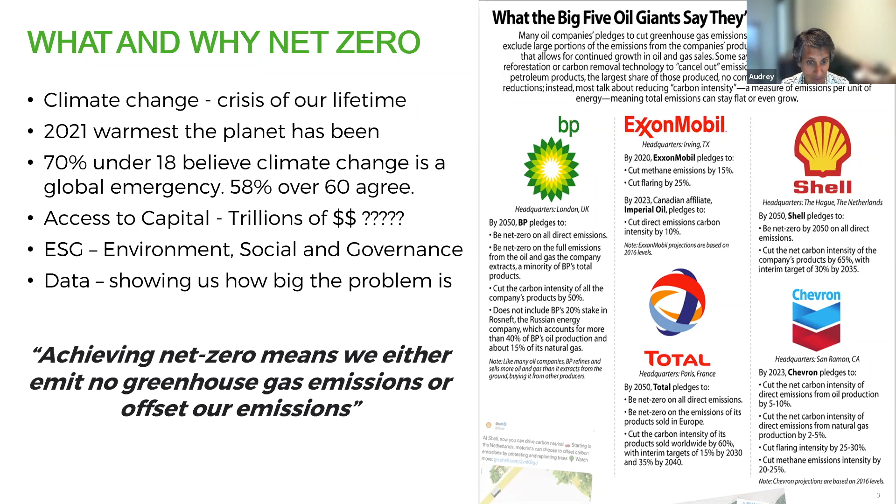Now, there's a lot of narratives going on right now. One of the ones that you'll hear a lot is that natural gas is not the fuel of the future because of methane, it is actually dirtier than coal. You've got a whole bunch of environmental groups going, the future is leaving oil and gas in the ground. We should shut down all of our oil and gas production, and we'll get all of our energy from solar and wind. And I'm going to talk about that in a second.

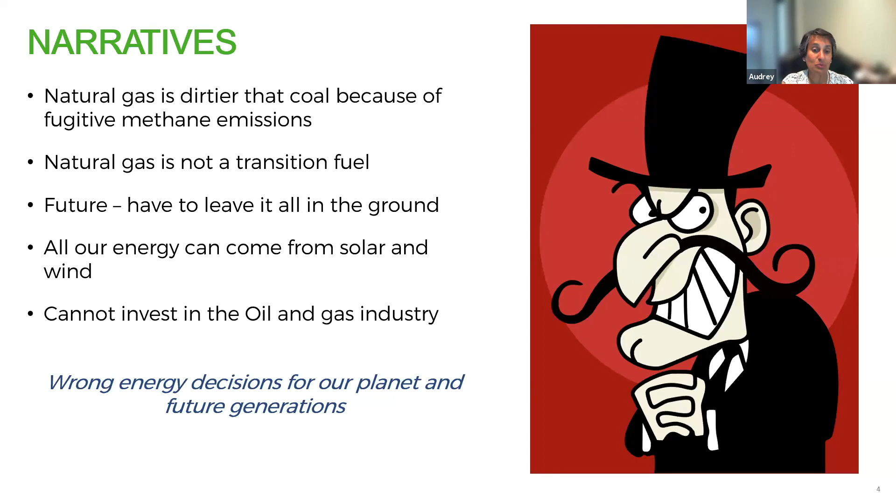At the end of the day, we're also seeing a lot of pressure on investment not going into the oil and gas industry, because the view is that our industry is contributing to climate change. And if we invest in it, then we're going to continue to have this temperature rise. The problem with all these narratives is that they are false. But the problem is, as they take hold, it's actually going to cause us to make the wrong decisions for our planet and for future generations.

I found this a very interesting fact, and it's actually a slide - I apologize, it looks old. It's actually a slide from my 2010-11 Distinguished Lecturer discussion. But one of the things that amazed me was every year, we use around 32 billion barrels of oil. That means every second the world consumes 1,000 barrels.

By 2100, we will have over 11 billion people on this planet who are going to need food, clean water, clean air, and are pushing for this higher standard of living. What that means is our demand for energy is going to continue to go up. In addition, we currently use 3 times that amount from an energy equivalency point of view.

And the phrase that was coined to represent this 32 billion barrels that we use yearly, it's referred to as a cubic mile of oil. And in total, our planet currently uses 3 of them. If we were to replace that amount of energy, I thought that it was quite interesting to look at that.

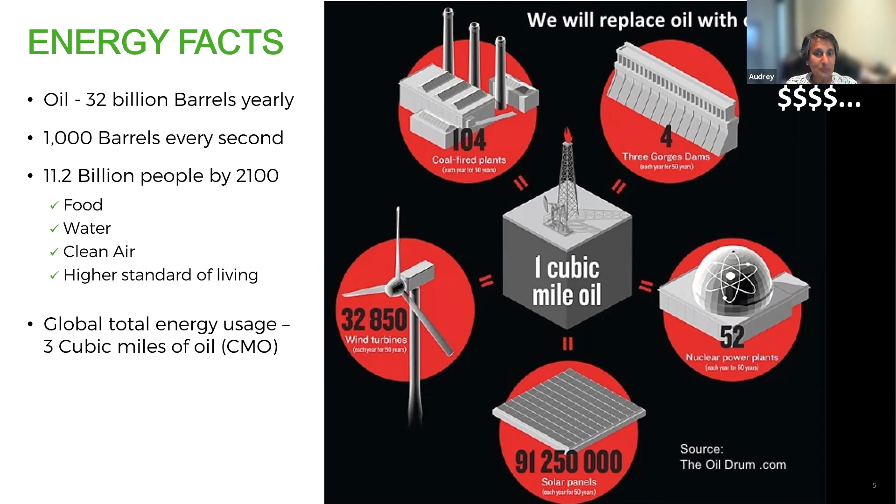So when people say, oh, we should just shut in the oil and gas and get all of our energy from renewables, I don't believe that that is truly feasible or realistic.

This next slide looks at where we get all of our energy. On the left-hand side, what you can see in that graph is 75% of our energy currently comes from oil, gas, and coal. By 2035, it will have increased and still be a very significant portion of our energy mix. Yes, renewables, hydro, and nuclear have increased, but they have increased at a far smaller scale than our demand for oil and gas. So when you look at the graph on the right-hand side, it does show a bit of a decrease in oil and coal, but more importantly, it shows us continuing to increase in gas.

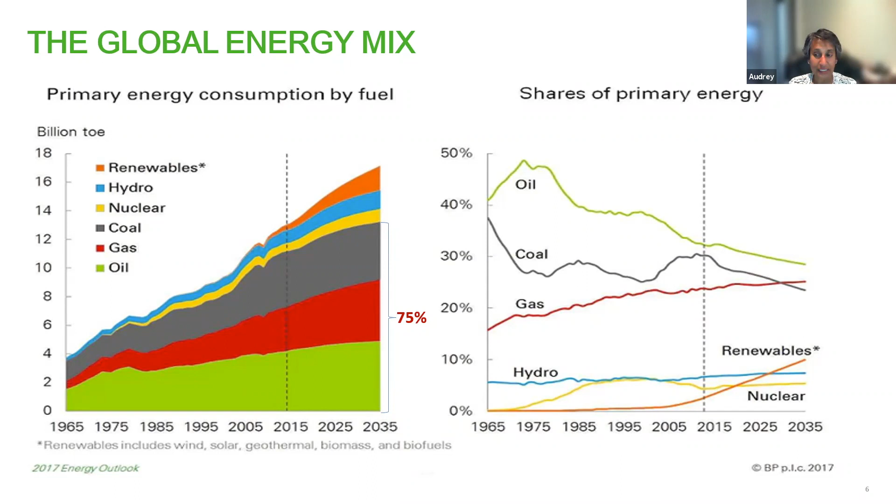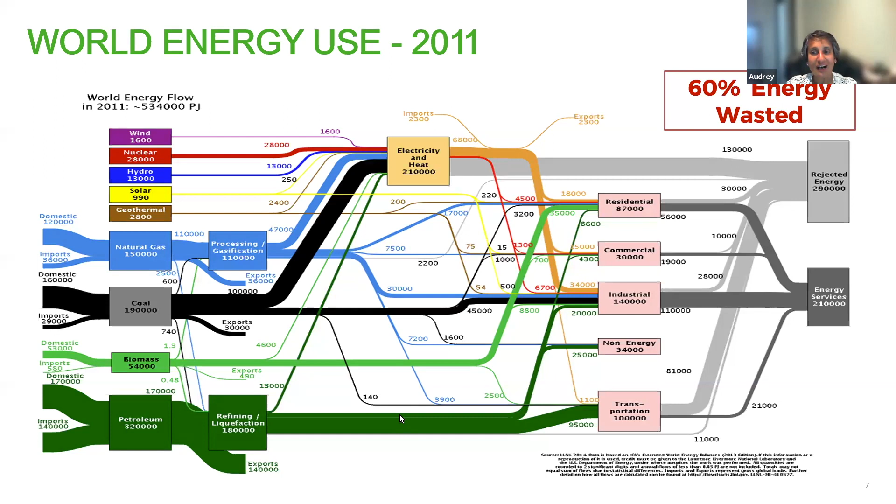Additionally, when you track world energy use and follow that molecule, I found this quite interesting. At the end of the day, from all our different sources of energy, we're wasting 60% of it through waste heat and energy efficiency losses. So between our demand and how we use it, I think there's an opportunity to look at the efficiency.

I think we've underestimated our emissions from all the different parts of our value chain. By underestimating it, we've missed a true opportunity to tackle the low-hanging fruit that solving and eliminating methane emissions brings to climate change. We know methane has a big impact, and that it's 86 times worse than CO2 over a 20-year period, and 25 times worse over a 100-year period. The problem is, as it lingers in the atmosphere, it starts to break down and eventually forms CO2, but in the process it emits VOCs and ozone and forms other toxic compounds.

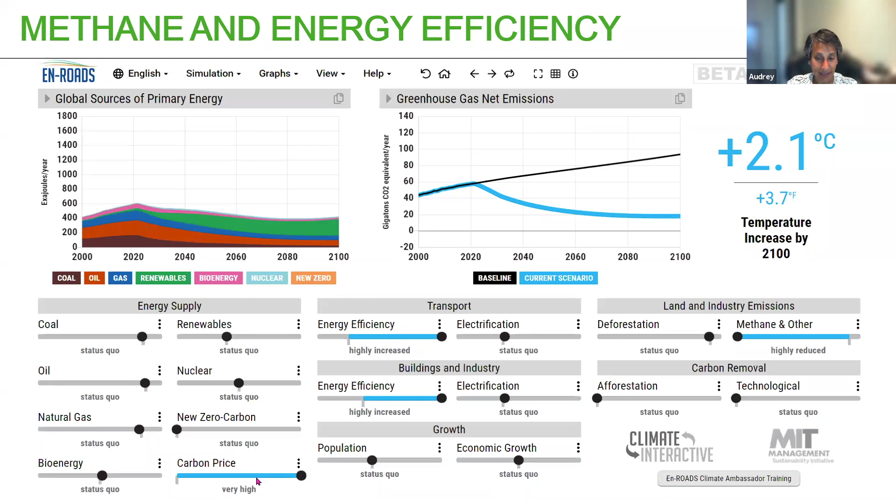So if we look at our industry and look at where the sources of methane are, what you'll see is that we have emissions all the way from our wells, in drilling, completions, production operations, all the way to distribution to consumers, whether it's in gas processing or equipment, or leaks or maintenance. It comes from tank vapors, valves, pneumatics, and compressor seals.

You'll see a lot of conversation around this component, but I believe that's less than 5% of our emissions. The big emissions come from well unloading, for example well testing, flowbacks, and workovers.

I've been in some conversations with folks in Australia, actually, where because of the risk of forest fires, there's a lot of venting occurring, which I think would be a great opportunity for us to reduce GHG emissions significantly. We'll talk about that in a sec.

Our compressor stations, pipeline maintenance and facilities all have maintenance requirements and upsets. When we start up an engine compressor that's gone down, we usually do a soft start, which means we're venting the methane to unload it. And then finally, we know that a lot of abandoned and suspended wells are leaking methane as well.

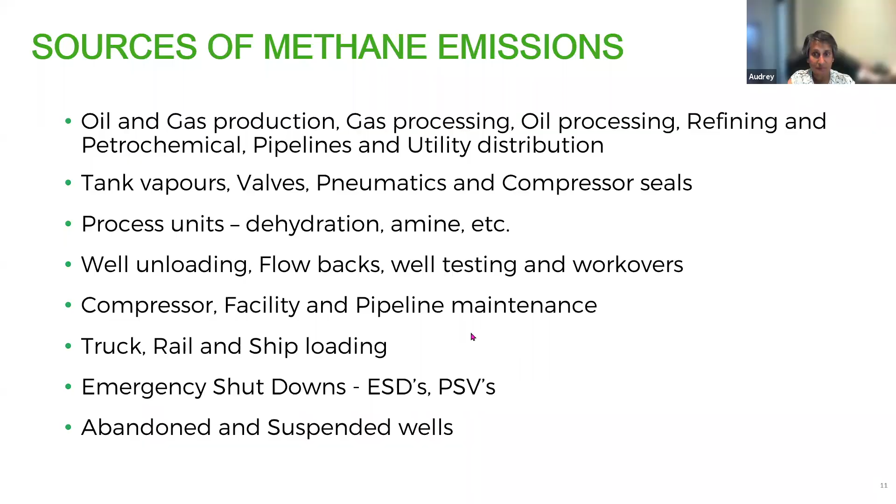Now, what's been interesting in the last little while is all of the different tools that are available now to detect our emissions. I've titled this slide 'There Is Nowhere to Hide.' As satellites, planes, and drones become available, what they're showing - and this is a quick project in the Permian - is all the sources we currently have of methane emissions.

And what was interesting, it also showed that there were a lot of flares that were unlit. 10% of the flares were unlit and venting methane.

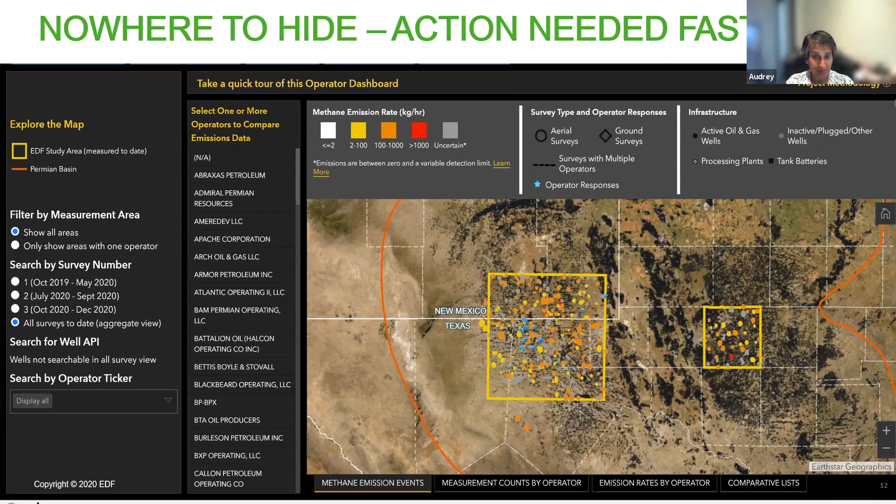The elephant in the room is we don't talk about these bigger emissions. We also assume that a flare is 98% efficient.

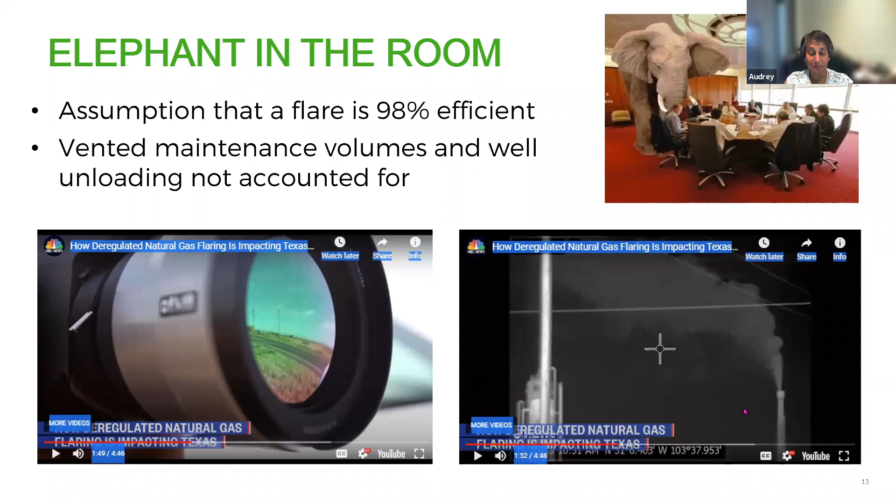So even though the flare is lit, most of that stream is escaping unburnt. And so when we assume and don't actually look at the flare, and assume it's 98% efficient, we're actually missing a very significant portion of our emissions.

We had a chance to work with Shell, and this was very early days - it was 2000 - where they were starting to look at efficiency. There was a lot of work done in Alberta around flares. What they were finding was the efficiency of a flare wasn't one number - it ranged greatly. It depended on the direction of the wind, the composition of the gas, and the size of the droplets in the stream coming to a flare.

All of those had significant impact, and the efficiency could be as low as 20% with a low heat content gas. So Shell did this testing out in the field to see if they could use enclosed combustion equipment that could handle high volumes and changes in throughput, and in this case, they also had hydrogen sulfide gas. So could we combust it cleanly, turn it into SO2, but make sure we didn't have any impacts at ground level?

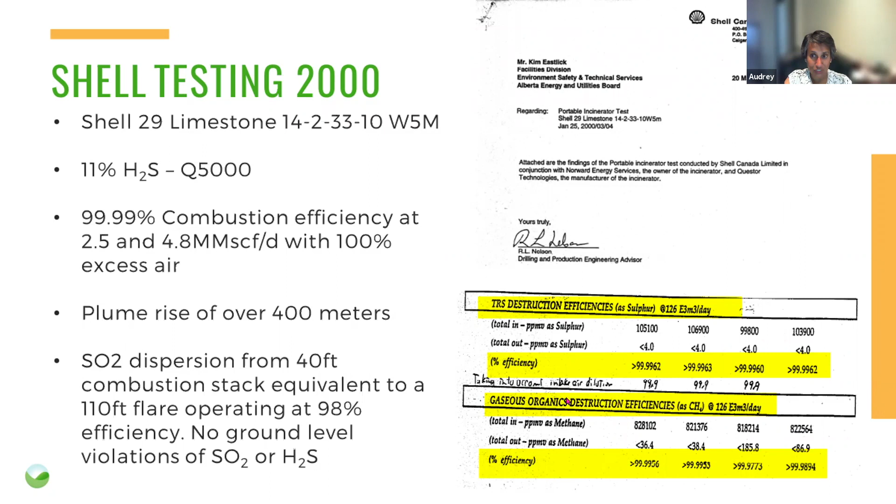And of course, what you're seeing in this test was, yes, it was possible to have complete combustion with high volumes of rich gas. Later on, that turned into an opportunity, and regulators both in Colorado and North Dakota - when clients use this clean combustion equipment - are able, in their emissions reporting and air quality permitting, to assume that it's 100% efficient.

And we recently achieved ISO 14034 certification. This new ISO standard is a standard for environmental technology, and it verifies combustion efficiency and the methodology to determine emission reduction. Recently, the Solar Impulse Foundation picked clean combustion as one of the 1,000 solutions that will have the greatest impact on climate change.

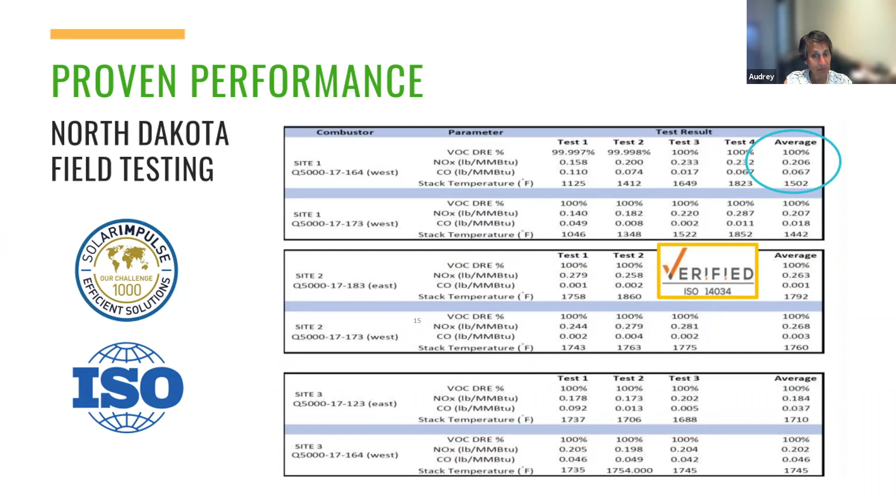So I'm going to switch and talk about why we should look at routine and non-routine flaring and venting. It isn't just about climate change - I think this plays a very big role in sustainability, energy efficiency, and creating that social license with community. We see many communities pushing for moratoriums or tougher rules. And I think at the end of the day, it's also about making sure we're doing the right thing.

So when you look at a flare, it's typically black and smoky. What that flare is showing is it's releasing volatile organic compounds, hazardous air pollutants, particulates, and of course there's methane slip in it. So it has not only an impact from a climate change point of view, it's got an air quality impact.

The next part of this discussion is community. No one wants to live next to a flare. And we know that a lot of facilities are usually located in poorer communities, so it has an impact in terms of social justice. In this picture, you're actually seeing a unit in a playground. In Colorado, the DJ Basin is in the middle of Denver. So it's a fine line to find that balance between industry activity and community well-being.

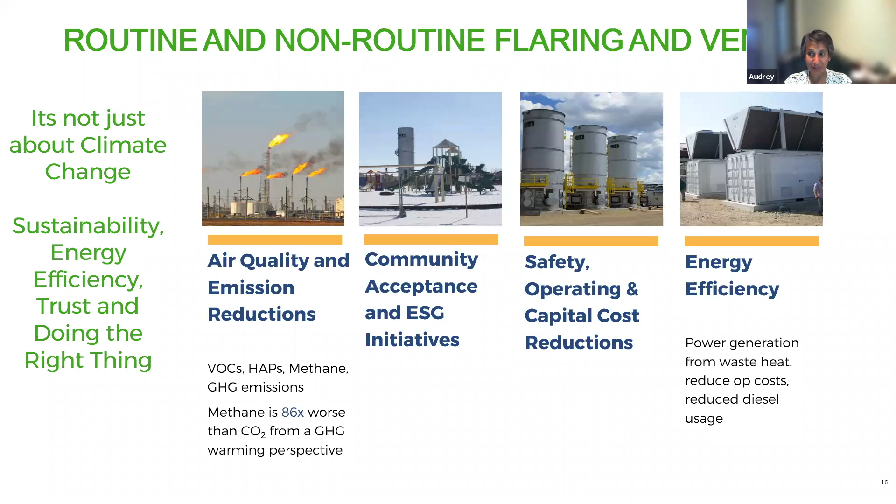The other reason to look at it is really around safety and opportunities to reduce your operating costs and capital. What you're seeing there is a rail car loading facility. The final piece is around energy efficiency. When you think about the fact that we're flaring and venting over 14.5 billion standard cubic feet a day, that energy could provide enough energy for a third of Europe, and we've been wasting it every day for the last 50 years.

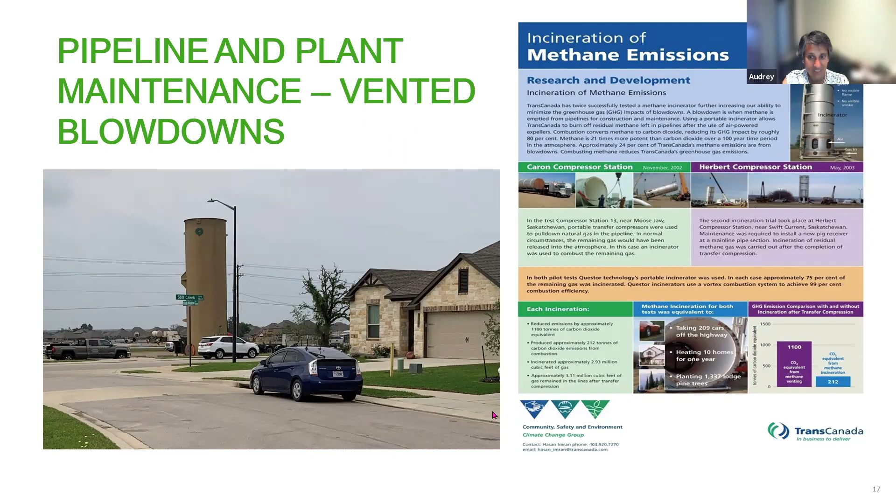I'm going to talk first on non-routine, because I think this is the area where we totally underestimated our emissions. In this case, the picture you're seeing is an example of pipeline maintenance or pipeline blowdown. You also see the unit is in the middle of a whole bunch of houses, and a lot of the research work done by TransCanada, a large pipeline company, showed that it was possible, instead of venting on a pipeline blowdown, by combusting, to reduce GHG emissions at a cost of less than $2 a ton. The next picture is a drone picture, and you can see the houses close by.

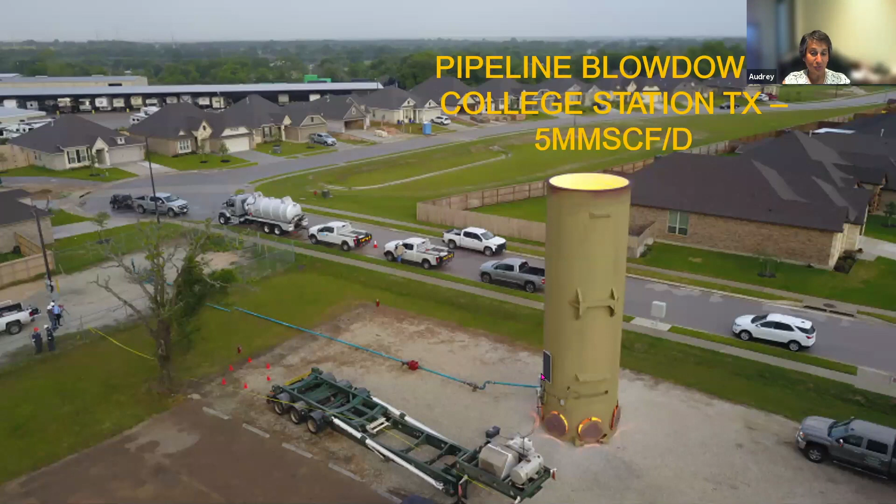What you see in this picture is the ability to burn about 5 million standard cubic feet a day without a big visible flame that has tons of radiant heat. I know from discussions I'm starting to have in Australia that because of the risk of forest fires, everyone has been very uncomfortable having an open flare. So this becomes a great alternative to eliminate that, but also to have a guarantee that there are no harmful emissions coming off the stack.

The work done around noise showed that at 80 to 100 feet, the road noise was actually greater than the combustion of 5 million standard cubic feet a day. It also showed minimal impact in terms of temperature. And we all know that if a flare was burning 5 million standard cubic feet a day, it would have to be placed far away, and you would have an enormous amount of radiant heat, which of course would create a safety issue, especially in dry conditions.

So when you look at cleanly combusting and not flaring, by doing it in an enclosed system, you also create this opportunity to have low ground level heat radiation. In addition, it gives you an opportunity to do something with that heat, and we can talk about that in a second.

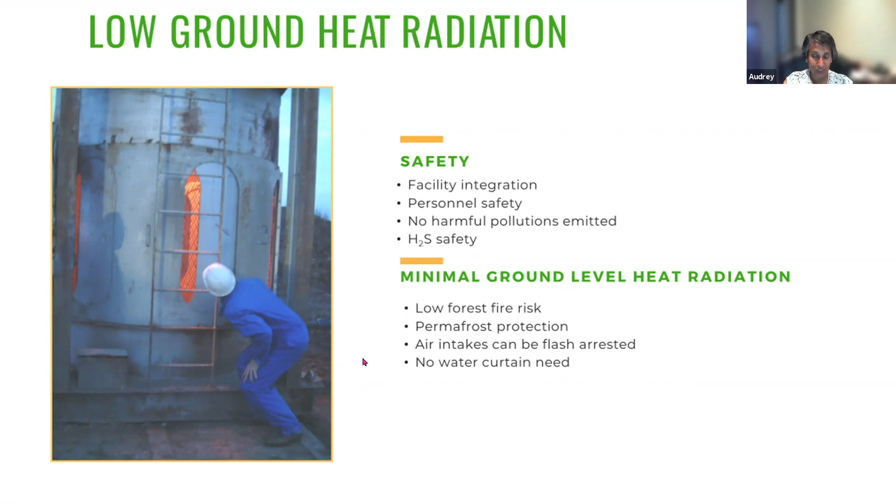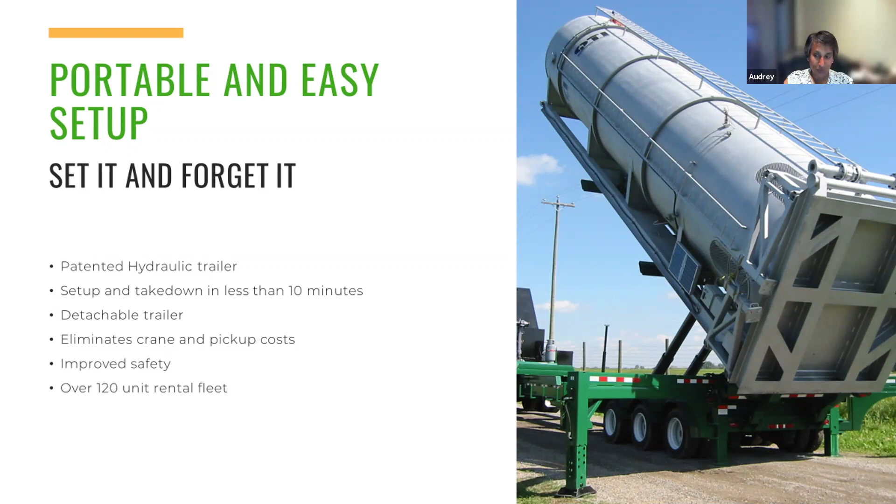There's equipment that's portable and easy to set up. In this case, what you're seeing is a patented hydraulic trailer that clips onto a unit, and it has the ability to set this unit, which is 40 feet tall and 12 feet in diameter, in place, ready to go in less than 10 minutes. When the unit needs to be moved to another location, it clips onto it, lays it gently down on the trailer, and moves it to a new location. So there is technology out there that can accommodate the non-routine.

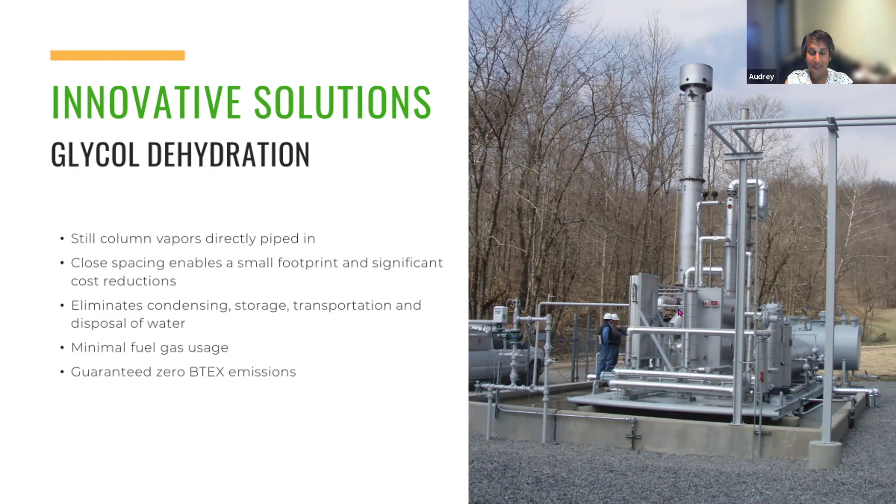On the gas processing side, there's lots of opportunity for innovation. What you're seeing there is eliminating water handling and condensing to deal with still column vapors. The vapors all come into this combustion device, which guarantees 100% destruction of BTEX, eliminates all the expensive operating costs with water handling and water disposal, and ends up with a less than 6-month payout, in addition to generating offsets and improving air quality.

In this case, this is a compressor station with 375 million standard cubic feet a day dehy glycol dehydration. Here, they looked at a large size unit to eliminate all flaring and venting. So this unit has a dual purpose: one is to handle the day-to-day volumes, but the other is to deal with the maintenance, blowdowns and upsets. So in this case, all their engine compressor maintenance came to this unit as well as the day-to-day. So it is possible to create a site with zero venting and flaring.

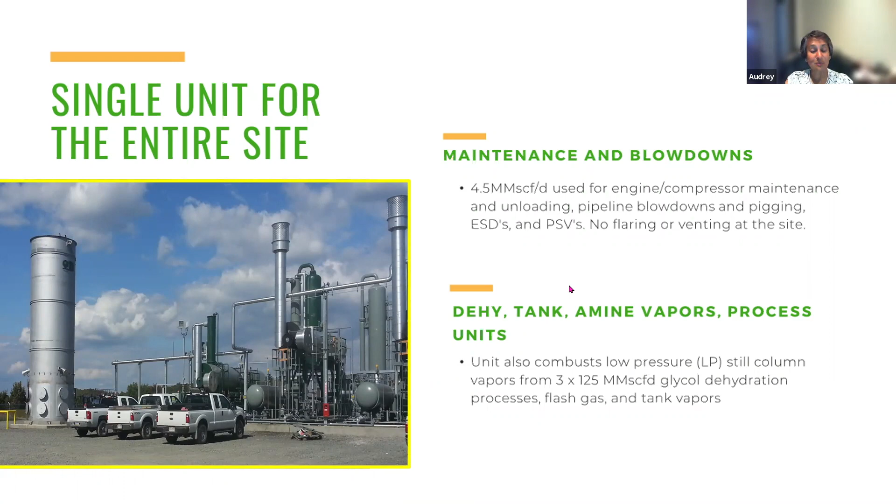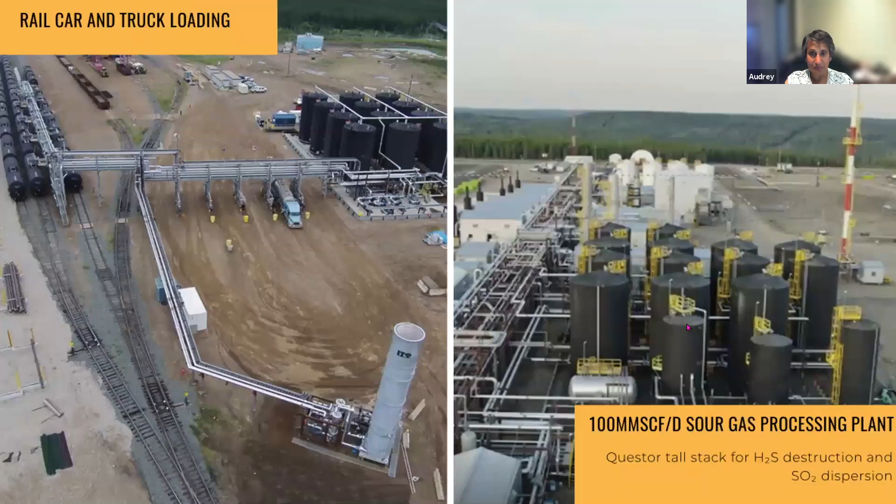I'm going to go through these really quickly just to give you a sense of it: fugitive tank vapors have solutions, gas processing - in this case it's the Eagle Ford and it's sour - rail car loading, a sour gas processing plant.

And then what I want to talk about very quickly is the opportunity to take that waste heat, because you're in an enclosed system, and generate power. Whether it's in oil and gas or in processing or refining, we've got a lot of low-grade waste heat that oftentimes we're using aerial coolers to eliminate, where we could instead use it to generate power. And what's interesting there is a lot of regulations are starting to see the conversion of waste heat to power as green power with zero emissions. What's nice is it's small footprint, there's zero emissions, and the battery is really simple. It's a hot water tank, and of course with small footprint.

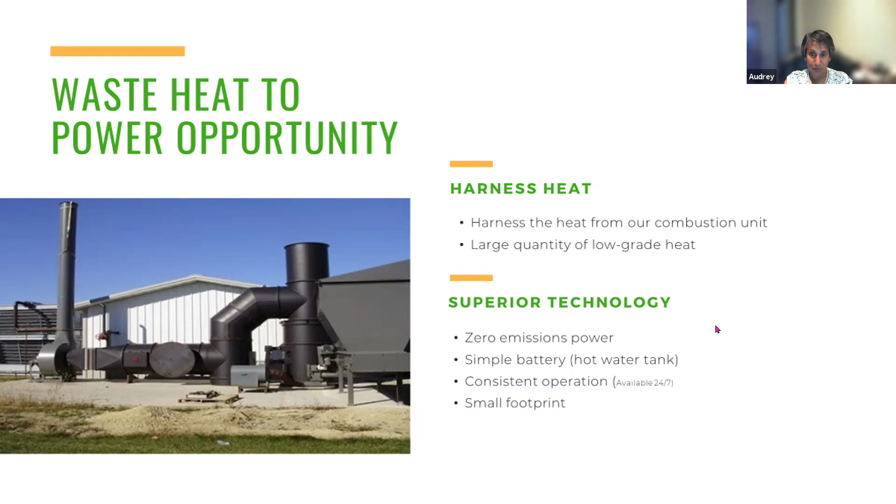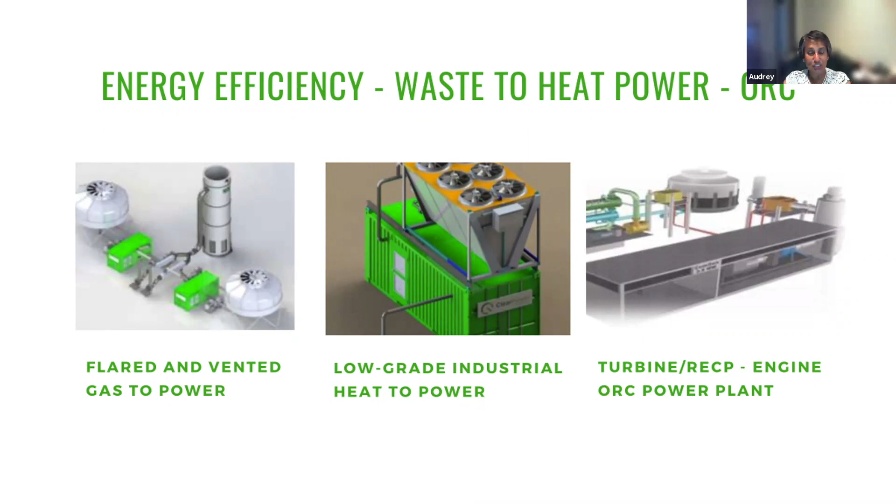The opportunities there are not only to do that with flared or vented gas, but to pick other industrial low-grade waste heat, or pick up the heat off a turbine or a recip engine and generate additional power by making them more efficient.

I wanted to illustrate this next example because one of the concerns everyone always has is, how do we finance these kinds of things? And sometimes we believe that we've got to choose between a strong industry or environment. What I want to do by going through this example is show it's possible to get to net zero, but to do it in a very cost-effective way.

So this is a small battery, around 300 MCF a day. I'm going to assume the flare is 95% efficient for this discussion. But by cleanly combusting and getting 100% efficiency, we would reduce greenhouse gas emissions 2,200 tons a year. If I take that waste heat and generate 200 kilowatts of power to run that site, we reduce GHG emissions another 1,000 tons of CO2 equivalent a year.

Because I'm generating power, and I'm going to assume the price is 8 cents a kilowatt hour, this generates revenue of 140,000 a year. So whether I'm replacing pulling power off the grid or putting it onto the grid or eliminating diesel power generation, I've now got power to run the site. If I look at a 10-year project life, my capital is about $1 million. The revenue I generate from offsetting my power is around 1.4 million. We've reduced GHG emissions 32,000 tons over the 10 years, which means we've reduced it at a negative cost of $13 a ton.

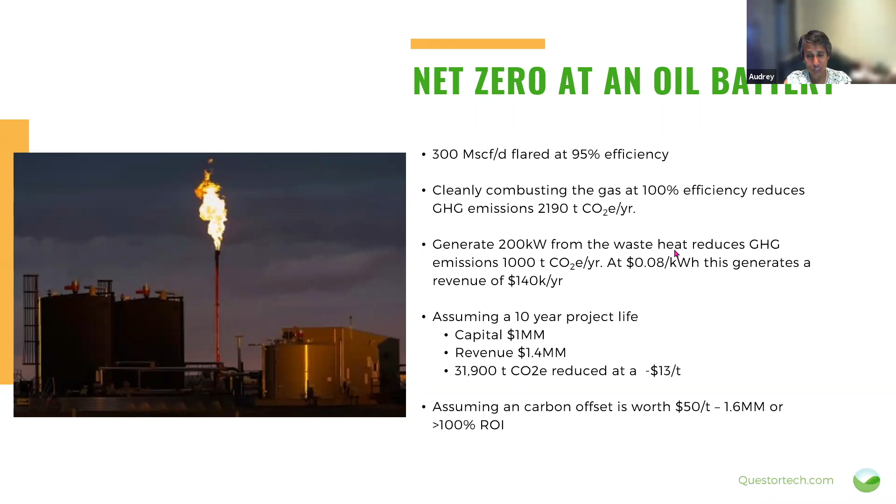Now, we can probably sell the offsets that we create here on the voluntary market. For the sake of this discussion, I'm assuming it's $50 a ton because that's what our carbon tax is in Canada. That's another 1.6 million of revenue, which means that investment in technology generates a return on investment of over 100%, with a strong voluntary market, because everyone's trying to figure out how to get to net zero. Like I said, we can either have a site with zero emissions, or we can buy these offsets to offset the emissions we can't quite get to zero. This market is starting to grow, and what I'm showing here is an opportunity to create that in our industry.

We've talked a lot about the methane piece, so I would be remiss in not mentioning, because this is a closed system, there's also an opportunity to pick up that CO2. Now, we believe that there's easy things to do because methane is so much worse than CO2, that if we can focus and get 80% of the way, thereby making sure we don't put methane into the atmosphere and we improve our energy efficiency, it buys us time to then do some of the tougher things like capturing the CO2.

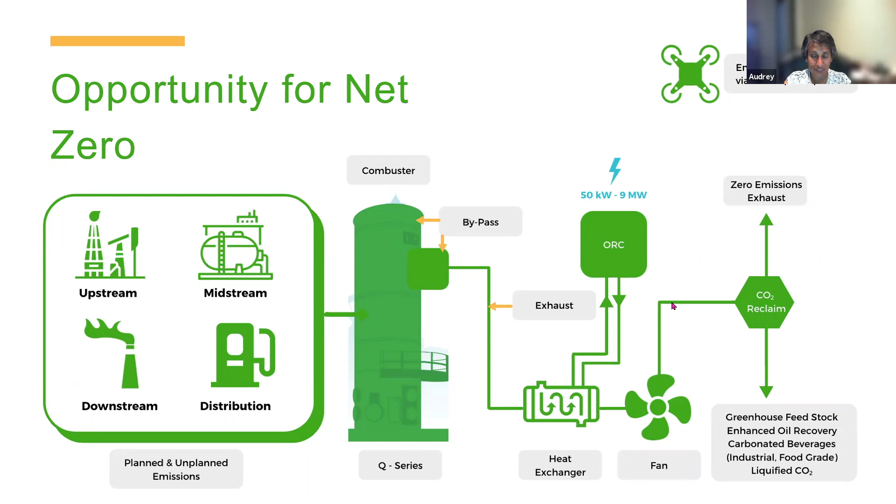I want to share this next slide because there's a lot of conversation on carbon capture. Yes, we may need that down the road, but I believe we should do the easy stuff first. I just want to show the economics around carbon capture.

In Canada, we've done two projects. One is Boundary Dam, a power plant, which cost around $1.5 billion to reduce GHG emissions 1 million tons a year. The other was Quest, another carbon capture project at a petrochemical facility, costing around $1.35 billion to deliver 1 million tons of CO2 equivalent reduction a year. As you can see, those are both very expensive from a capital point of view.

In comparison, this methane abatement project in Mexico involved 13 oil battery sites that were venting all of their associated gas. For $8.5 million, they were able to reduce GHG emissions by 450,000 tons a year by cleanly combusting and not venting the methane. That $8.5 million also included 3 waste heat to power systems generating 200 kilowatts at sites that had enough gas to generate that power. So for $8.5 million, we reduced GHG emissions 450,000 tons. If I scale that to 1 million tons a year, it would cost $20 million.

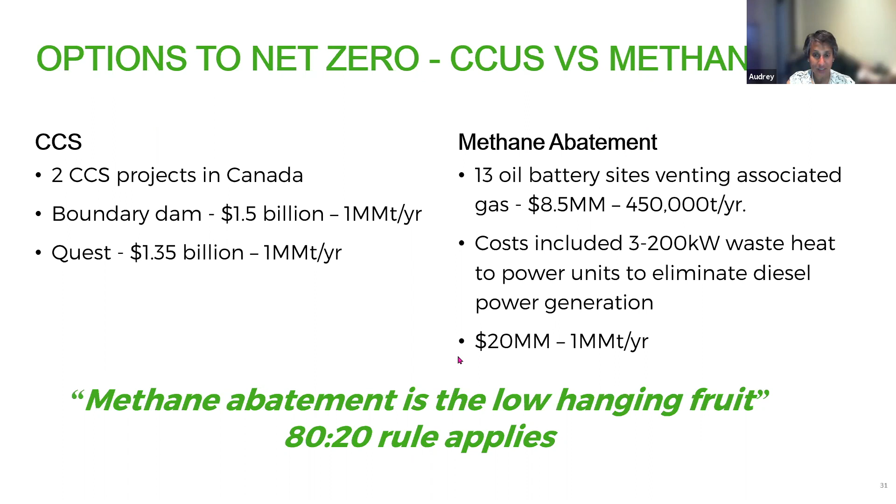As we look at the voluntary market developing, I think there's a big opportunity in Australia especially, because there is so much venting going on that by cleanly combusting we probably create a very, very strong business case to reduce GHG emissions. And once again, 80% of the emissions are coming from 20% of the sources. So if we focus on the big stuff, which is flaring and venting, I think we've got an opportunity to make a big impact and really reduce that temperature rise.

These are some quick examples because I think this becomes very, very important: how do we create the win with community? As soon as you have a big black smoky flare and people are concerned about the odor and their safety, you lose the chance to change the narrative with them. And I think this is important, and oftentimes you'll see issues like moratoriums.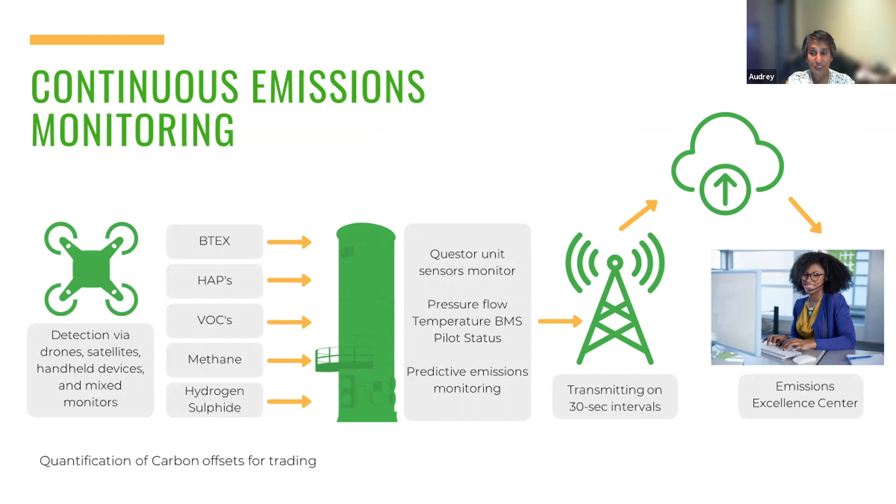And then finally, as the world gets more and more focused on emissions, with data and with control over combustion, there's an opportunity to demonstrate with continuous emission monitoring that the site is net zero or zero emissions.

So in conclusion, I'm hoping I've illustrated a cost-effective path to get to net zero. It really is around focusing on eliminating flaring and venting and looking for opportunities for energy efficiency. In some ways, what I'm talking about today is counterintuitive - changing one greenhouse gas to another, i.e. methane to CO2. But because methane is so much worse than CO2, it really makes sense.

I truly believe that natural gas is our fuel of the future, but we've got to deal with the methane. If we allow ourselves to continue to emit fugitive methane, the narrative that it's dirtier than coal will stick. So we've got to do something. Data has changed the game - we can't greenwash, we can't hide away, there's going to be nowhere to hide. It would be better for us as an industry to be proactive than wait for this news to come out.

And there are technology solutions that will get us 80% of the way, and they don't cost that much. I believe this is our time for courage and leadership. And if we don't deal with emissions, I think it is a human rights issue. I think we've got the opportunity to create the future that our children deserve.